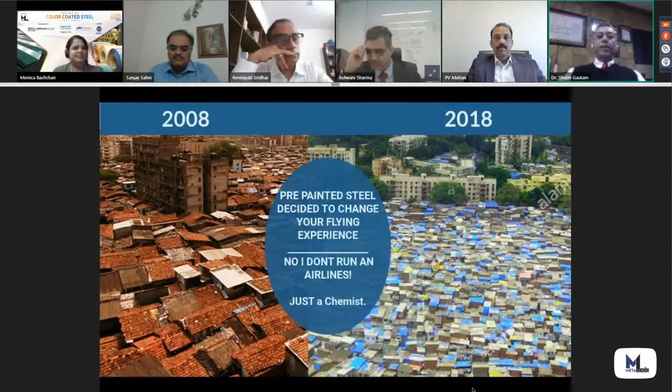This is what India was in 2008 on your left. If you landed on Mumbai airport, this is what you would see. And if you see on the right, this is what you see when you land here, right? So what are we doing? We are basically changing one roof at a time. Welcome to the world of color-coated steel.

So when we get into the world of color-coated steel, what is it? The question is, why do we need color on steel? Because we have zinc. We have zinc and aluminum called galvalume. And now we've got zinc, aluminum, and magnesium. So why do we need color? And of course, we need color because we are in the business of protection.

And what is the business of protection? Business of protection is pretty simple. A king protects a kingdom. A father protects a family. A CEO protects an organization. And make no mistake, color protects steel. Color is not for the aesthetics of it. And I'll come back on this point a little later because we've got about 10 minutes to share.

This is a history of galvanizing. Early 1900, there were cold rolling mills and hot rolling mills. And then someone called Mr. Sendzimir, a Polish native, introduced something where you dip steel into molten zinc. Between 1920 and 1930, World War I is just about finished. In the process, by 1938, Mr. Sendzimir had an operating galvanizing line. By 1950, American steel companies knew the process was solid. And between 1945 and 1958, they built 56 Sendzimir galvanizing lines.

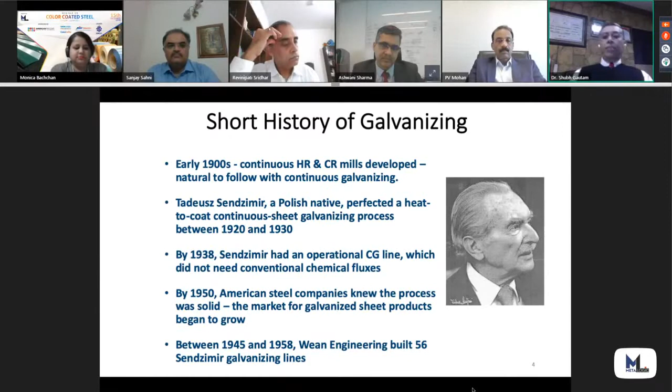The question is, why is galvanizing called Galva? Galva is not a Latin name. It's not any other French name for zinc. Why do we call it galvanizing? Because of a scientist called Luigi Galvani, who introduced to the planet the process of electrochemical engineering, using different metals. And that was followed by another brilliant scientist called Alessandro Volta, who said electropotential between two metals creates a corrosion cell.

And in awe of their contribution to the world of electrochemistry, Sir Humphry Davy drew the conclusion that zinc protects steel. I'm quoting GalvInfo on this. Zinc protects steel, and hence galvanic protection, in the honor of Luigi Galvani. That's why we call it galvanizing, just to let you know.

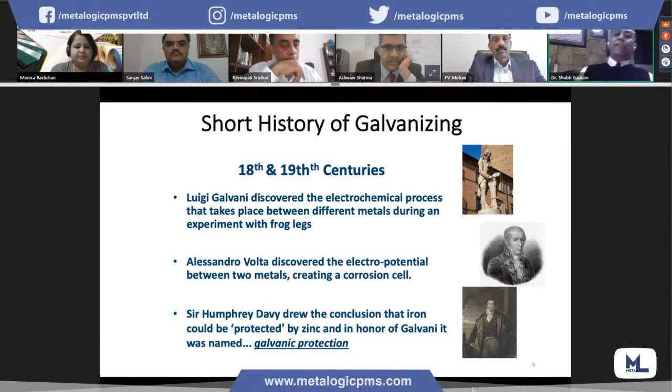And when you say galvanizing, what you see here is an alloy layer. If you take a galvanized steel, on the bottom and the top is a very complex mixture of what we call iron, aluminum, and zinc. It's called alloy layer, and this is responsible for protection. Zinc, aluminum protects steel. How many types of hot dip coatings are there? I'm talking about the basics.

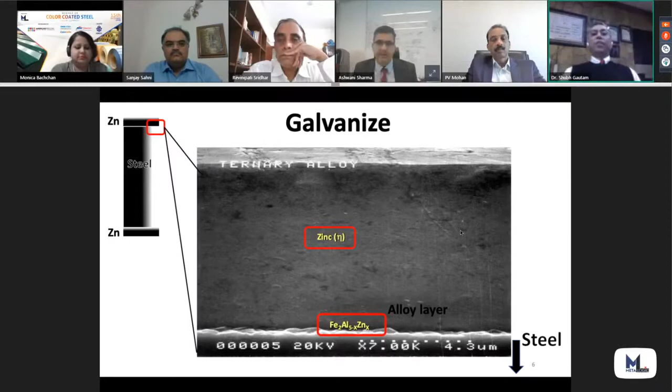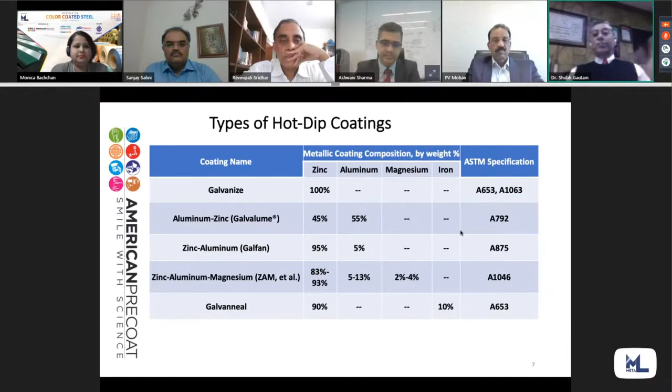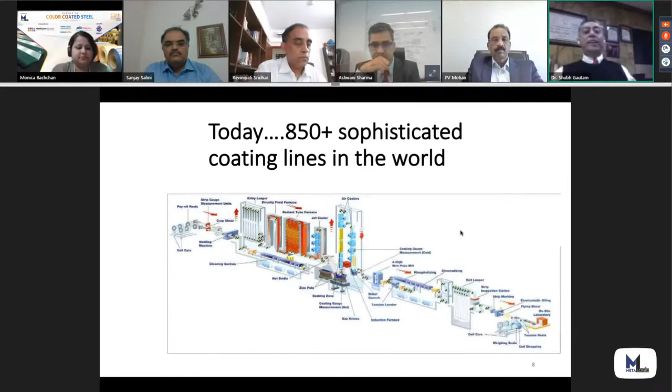We have galvanized, which is 100% zinc. We have galvalume, 45-55 zinc and aluminum. We have galfan, 95%, 5%. We've got zinc, aluminum, magnesium, which has 2 to 4% magnesium. We have galvanneal, 10% of iron. And with this, today there are more than 850 sophisticated galvanized coating lines on this planet. But that's about galvanized.

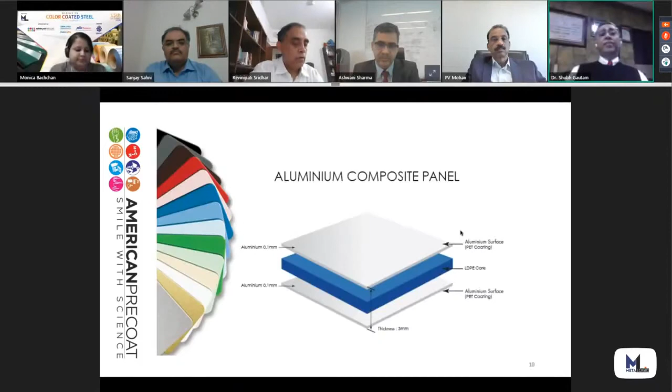Why do we need color? We need color because we have to make beautiful appliances, fridges, microwaves, washing machines, refrigerators, aluminum composite panel for architectural applications. We have to make a lot of accessories, the downspouts, etc. And these happen in a color-coated steel.

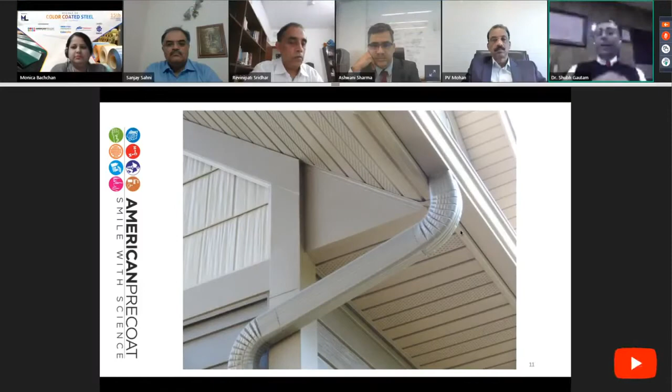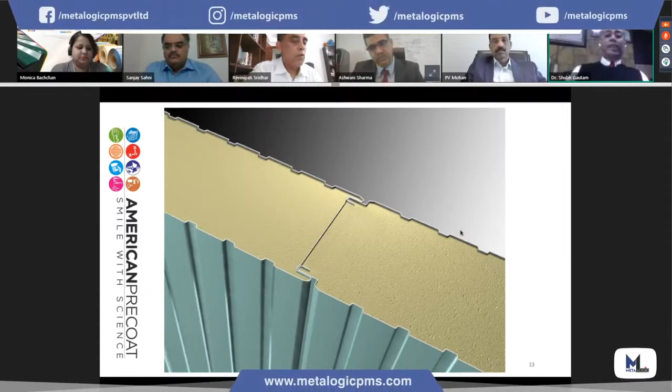We make air conditioners. We make convectors out of color-coated steel. We make sandwich panel. Sandwich panel is a beautiful insulation property that helps typically in countries like India in hot climate. We make beautiful garage doors out of color-coated steel. We make awesome roofs out of color-coated steel, which are warranted for up to 40 years. This is a live photograph where American Precoat has contributed in this project.

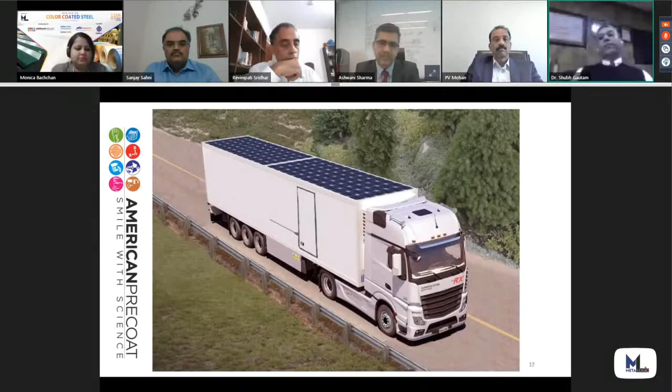So the question is, this is a truck trailer body with a solar panel on top, which is a product out of pre-painted steel, color-coated steel, essentially. So what is color-coated steel? If you look at steel, and if steel was 6 feet wide, so you take 0.5 mm. 0.5 mm is the thickness of a typical color-coated steel used for roofing application, architectural application. You imagine that 0.5 mm to be 6 feet.

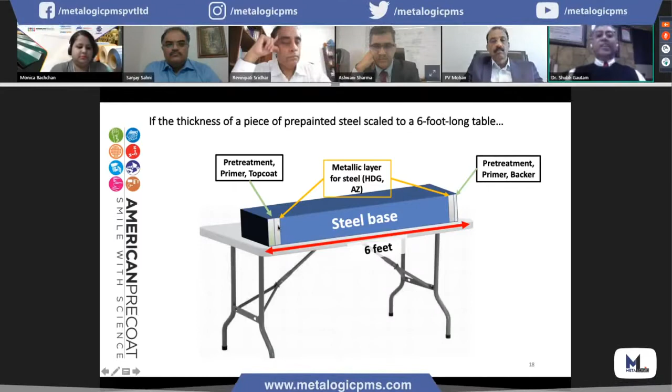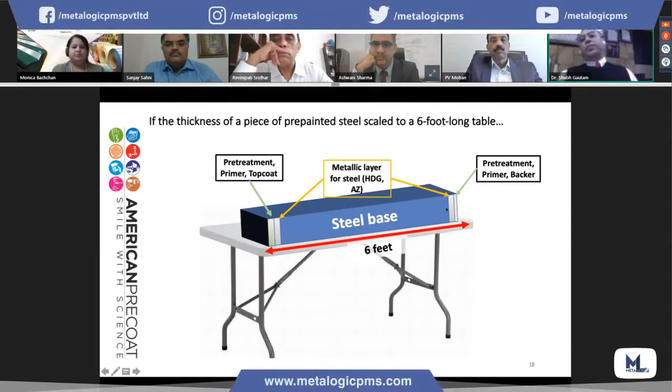What you see here is this tiny little layer on two sides is the metallic layer, and then that tiny layer after that is color. This is the breakup of the contribution of color to the entire steel. That's all the color does to a steel. If I would like to present a steel as a 6 feet long bar, this is how much color we put on. Why I'm telling you is the cost implications of color and the value proposition of color versus the performance that it offers us.

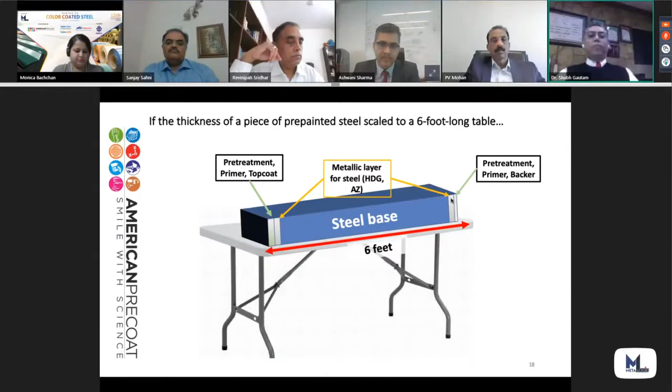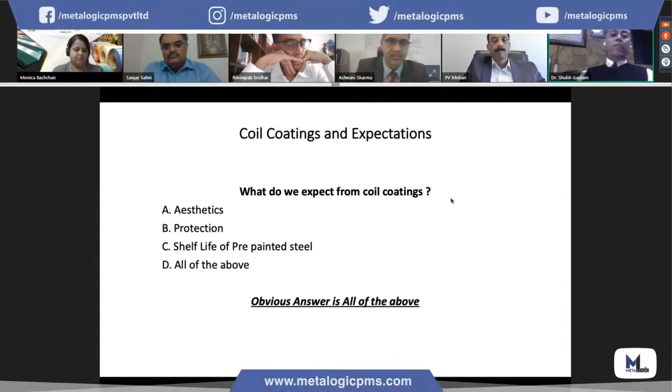So what do we say? Coil coatings or color-coated steel, why do we use them? A, aesthetics. B, protection. C, shelf life of pre-painted steel. And D, all of the above. Of course, the answer is all of the above. Now, when you say the answer is all of the above, the bigger question comes is, what is the enemy of color-coated steel? And this is where the entire fact and fiction comes in. Even today in India, people buy color-coated steel by measuring the amount of zinc and zinc aluminum.

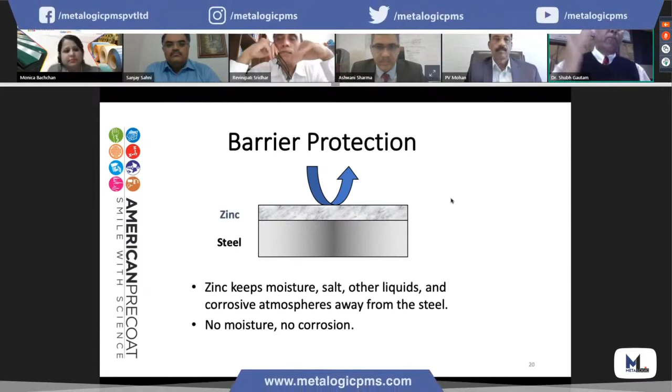My question is, barrier protection that defines the protectability coming from zinc is because in a typical galvanized steel, zinc is exposed to the atmosphere. When you put color on top of it, what is exposed to the atmosphere, zinc or color? So when we buy color-coated steel, our first discussion should be on color or should it be on zinc? Our first discussion should be on quality of color or on grammage of zinc? Our first point of discussion should be on cost of color or on quantity of zinc. And this is where things could be better.

This is a toothpaste. And what does a toothpaste have? Let me tell you what a coating is. If toothpaste was a final product, then the cellulose gum is the resin. It's the resin that makes the color. The hydrated silica, the mica, and the titanium dioxide are the pigment that give you that beautiful look. The solvent is water, and additives are sorbitol. This is how a coating is manufactured. It's got too many ingredients.

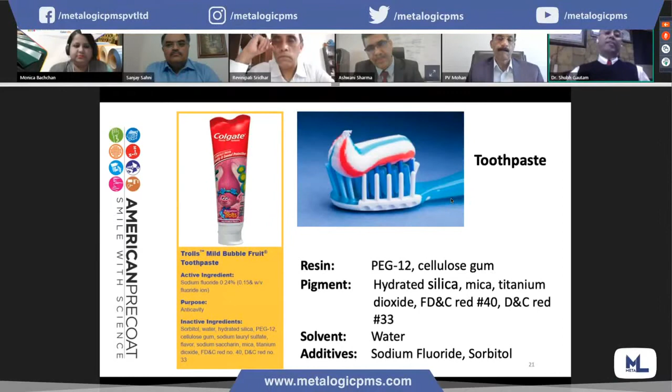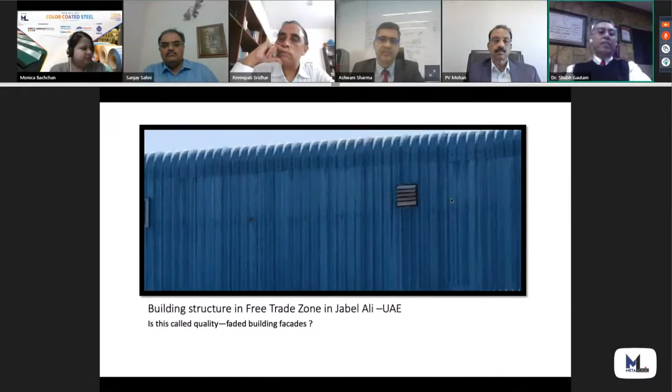We did a small project in Middle East because Middle East prides itself to be one of the most quality conscious segments in this part of surrounding Asia. And this we do probably every 3 years. And this was part of one of our mandates, benchmarking quality at Jebel Ali. And I'm sharing these things with due permission from our partners and coworkers. This was done in Jebel Ali to prove a point. This is a building structure in free trade zone in Jebel Ali, UAE.

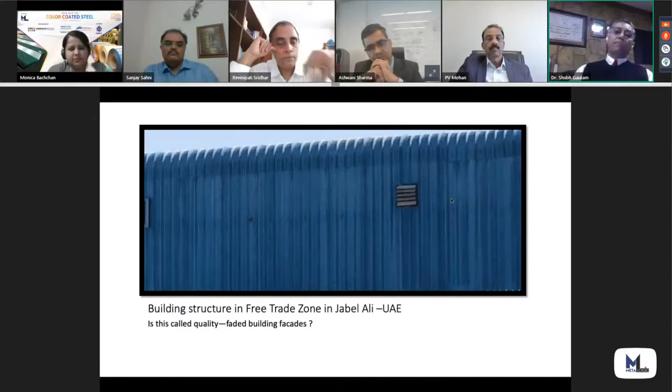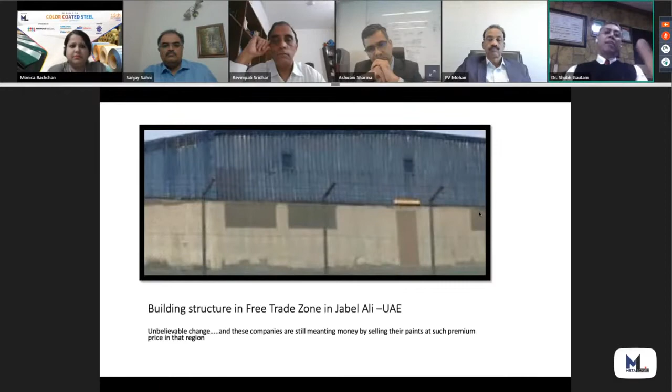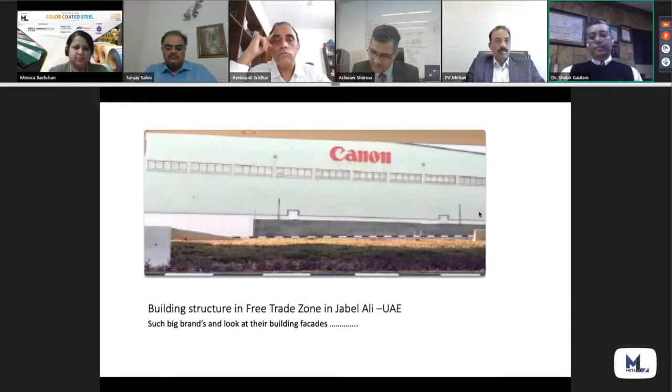Coatings are phenomenal products that improve the property of the surface. And if the weathering happens on the surface, then let us look at coatings from a different angle. Color-coated steel is not about zinc, not about grammage of zinc and grammage of zinc and aluminum. Color-coated steel is about color. Let me give you some small little snippets of what coatings can do in life. And these are small videos I'm playing for you. This is a treated product with a very special American Precoat coil coat. And what we are adding on it is ink, because ink is smudgy in nature, right? And see what happens.

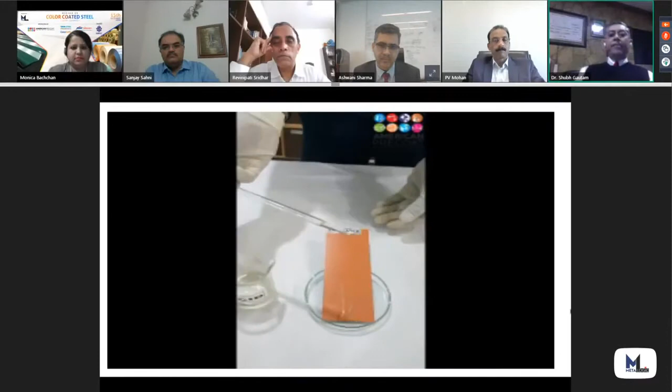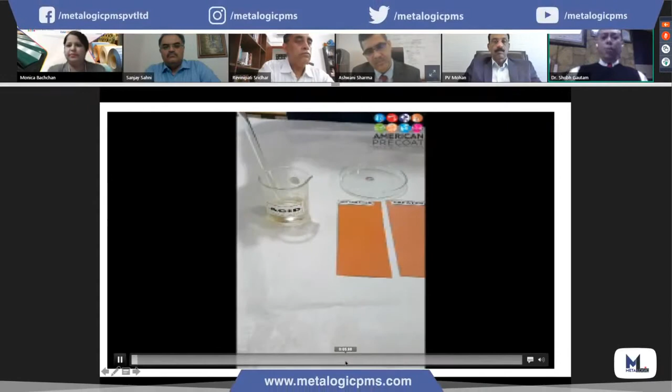Dr. Shubh Gautam? Yes. Sorry to interrupt. Mr. Sridhar has to leave right now, and he will try to join us during the Q&A. I just wanted to make an announcement that he's leaving right now. Thank you, Mr. Sridhar. I hope you will be able to join the Q&A. Thank you so much. Dr. Gautam, please continue. Sorry to interrupt.

Yeah. So this is what happens. People say when we erect buildings, we have grease that is applied. We have scratches on the roofs. And because of the scratches, the color comes off. And because the color comes off, hence zinc is there.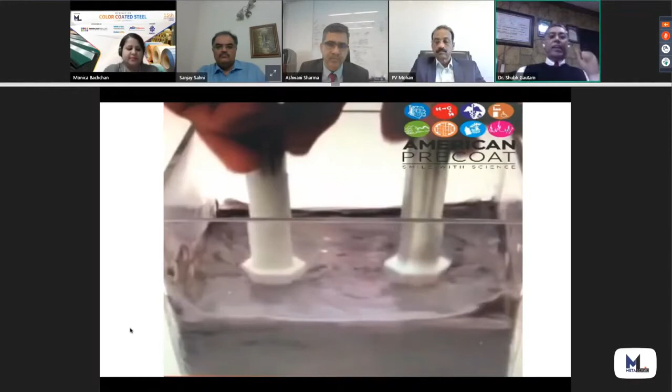I can tell you we have scratch hardness that can go up to 3,000 grams on a point load. You know what that means? It's 3,000 grams on a point load, which means for 3,000 grams on a point load, a human being will have to weigh more than 425 kgs. This is a bolt and nut test. Let me play it for you.

So is there any audio with the video? Because we are not able to hear. No, the video has no audio. It's only visuals. Okay.

Can you believe this is all because of coatings? Look at this carefully, this particular thing. Coatings are valuable. Coatings give you all kinds of anti-corrosive treatments. And how corrosion happens, I'll come back once we stop the share screen. Look at this carefully. This is a paper napkin. And if you add water to it, nothing happens.

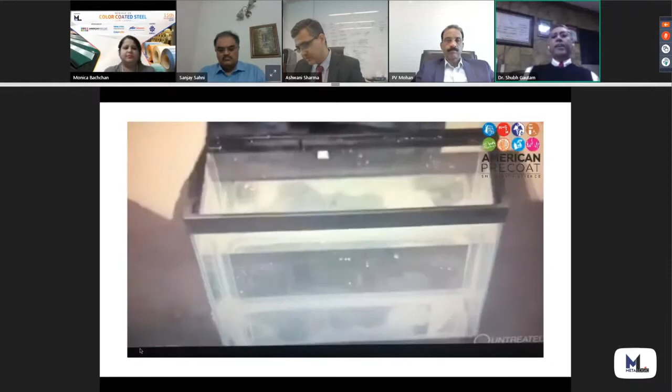The same thing is applied on steel. And this is two paper napkins. One is coated on the left, the other one is not coated on the right. What happens if we dip this into a bowl of water? We take it out. Can you believe it? The paper napkin on the left is still dry. If water will not stay, the steel will not corrode. That's how important paints and coatings are to steel.

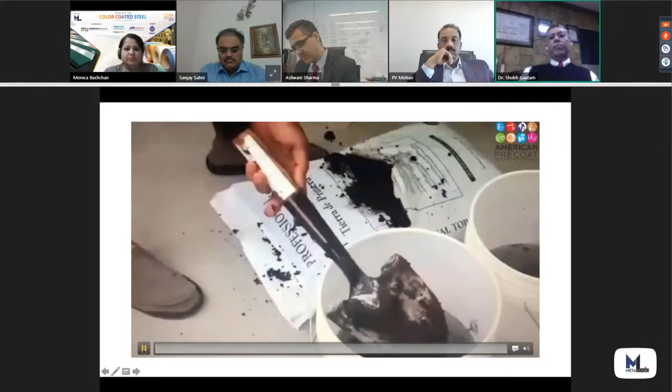These are a couple of co-workers who volunteered. Can you believe this? If this would apply to your roofing sheets, would your roofing sheets ever corrode? Corrosion happens when water stands. If water would not stand, corrosion would not happen.

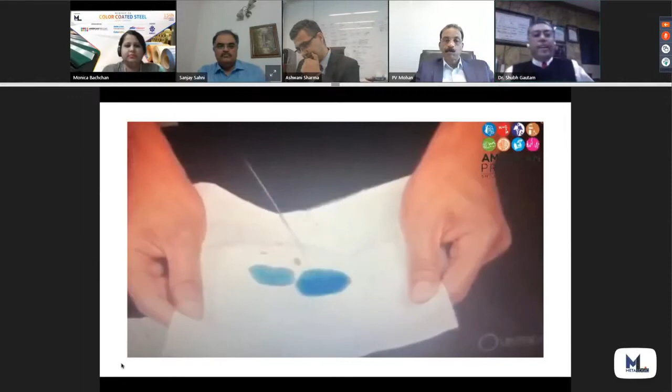So understanding India, and let me quote here, Randy Pausch. The brick walls are there for a reason. The brick walls are not there to keep us out. The brick walls are there to give us a chance to show how badly we want something. We stand at the precipice of going from 2.3 million tons to 4 million tons of color-coated steel. And we don't know what color is.

I'll end by saying, life is always new, mind is always old. Life is never old, mind is never new, hence they never meet. With this, I'll stop sharing and I'll go live. Monica, can you take me live again?

Yes. The last point that I want to make in color-coated steel, and this is where the fact and fiction comes in. Typical specification of a color-coated steel is 5 microns primer and 15 to 18 microns of top coat, right? Do you know, gentlemen, what is 5 microns? Wikipedia says the average diameter of one human hair is 100 microns. 100 microns. And what are we saying?

We're applying 5 microns of primer and saying, wow, we have a primer on top of color-coated steel. We are better off not applying that primer, because that 5 micron primer with a deviation of 2 microns is actually 3 microns. Slice one human hair in 100 parts, what you get is the primer that you have on color-coated steel.